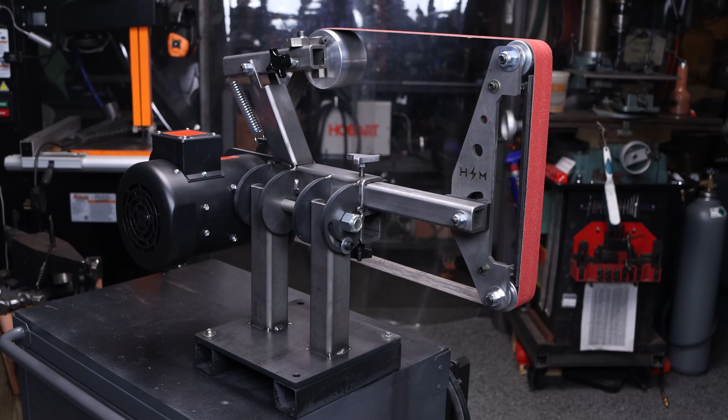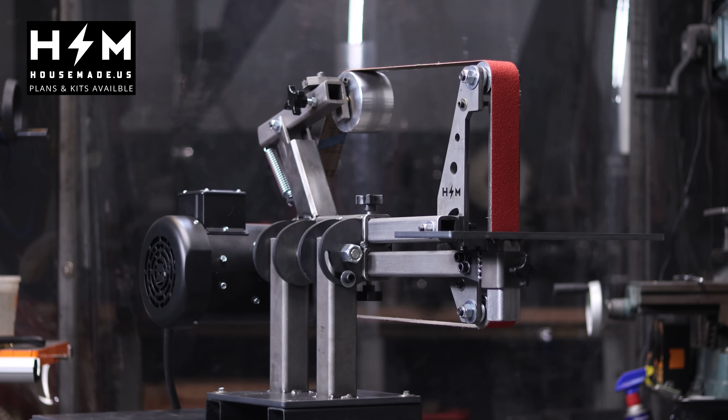But ultimately what it is, is a very nice, heavy industrial belt grinder. The idea was conceptualized right here on YouTube, and then you all gave me your feedback, and we've now brought it all the way up from a concept to a prototype, many different generations, and then ultimately led it to manufacture.

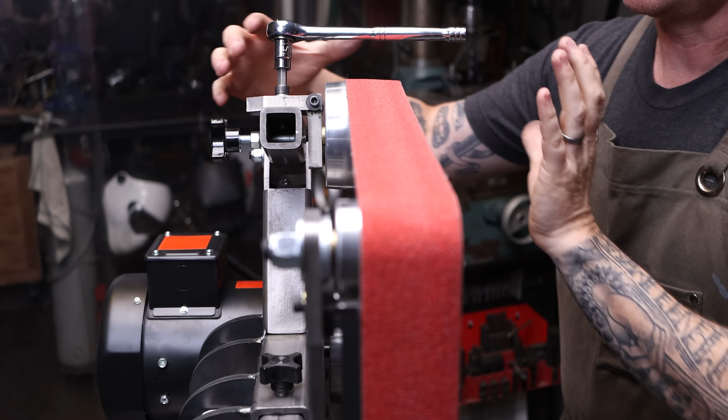Now, this video is going to seem a little bit Revolution specific, but it will apply to just about any 2x72 belt grinder on the planet, okay? So I encourage you to watch the video all the way through. There's a lot of details. Just sit down, watch it, and soak in the concepts that we're talking about here, because the mechanics, the physics, and everything that's going to be talked about here, the concepts, are going to apply to just about any belt grinder, okay? And then once you've watched it all the way through, you can jump into your build and actually start tweaking it and tuning it. I do believe that's the best way to achieve success.

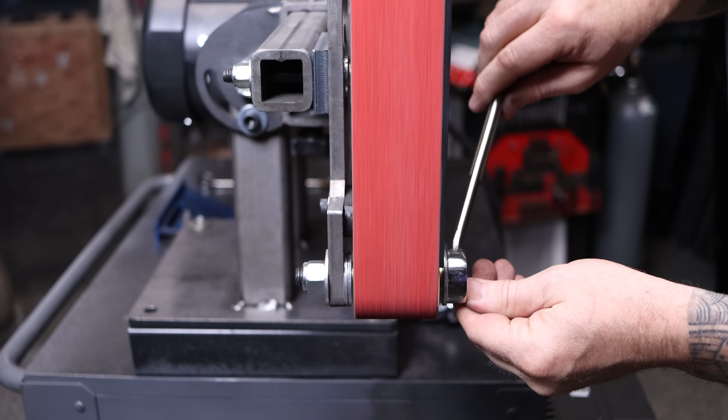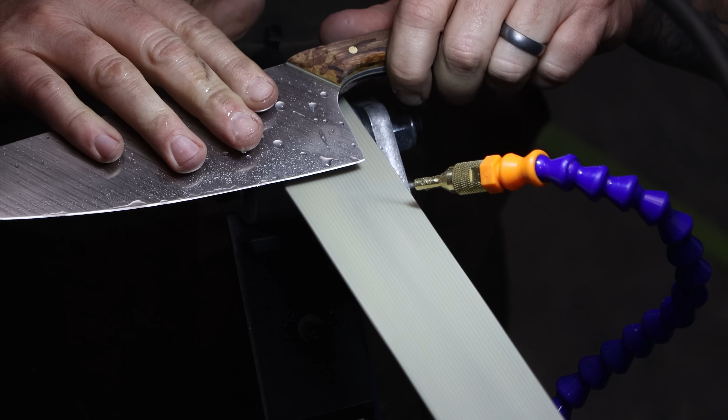Now, a few of the things that we're going to talk about in this are probably going to blow your mind a little bit about how simple it is to actually get a belt grinder to track forward and reverse. I get a lot of questions about that. Why would you want to run your belt grinder in reverse? There's other videos out there on that. I like to run my grinder in reverse for putting edges on blades, sharpening, working with wood handles. There's all kinds of reasons why you'd want to do that, and I love having that flexibility.

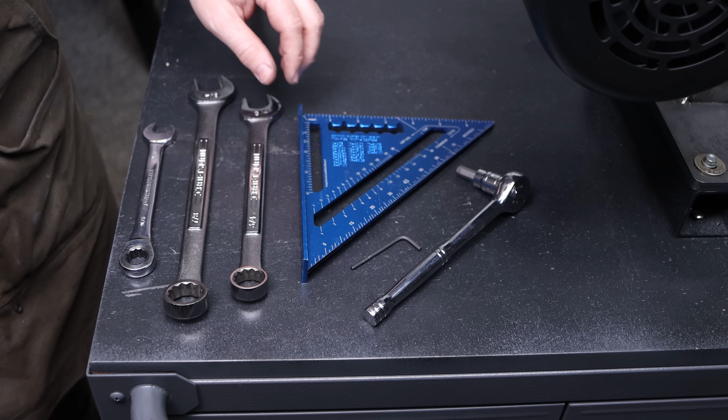Anyway, why don't we just jump right in? I'm gonna go through some of the tools and things that we need to get set up, and then we're gonna get this belt grinder tuned and ready for work. All right, let's discuss what we need as far as tools. We're gonna need some box end wrenches. I have a 9/16, a 7/8, and a 3/4. We're gonna need the Allen wrench that you'll use to loosen up your drive wheel. In my case, it's a 3mm. A 5/16 Allen wrench. In my case, I'm using a ratchet style.

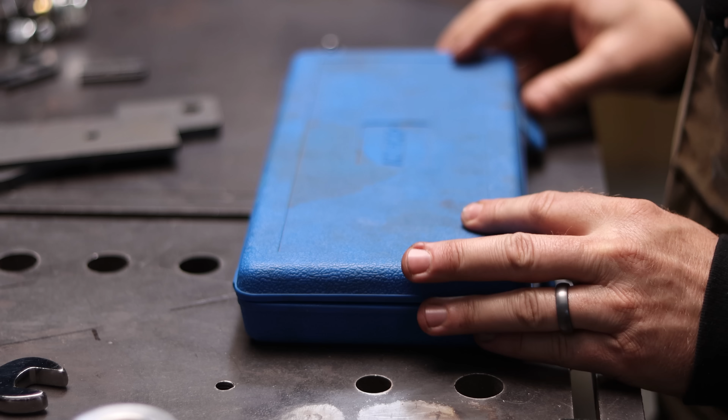Believe it or not, this is one of my most favorite tools in the entire workshop, my little set of these guys. I got them on Amazon.

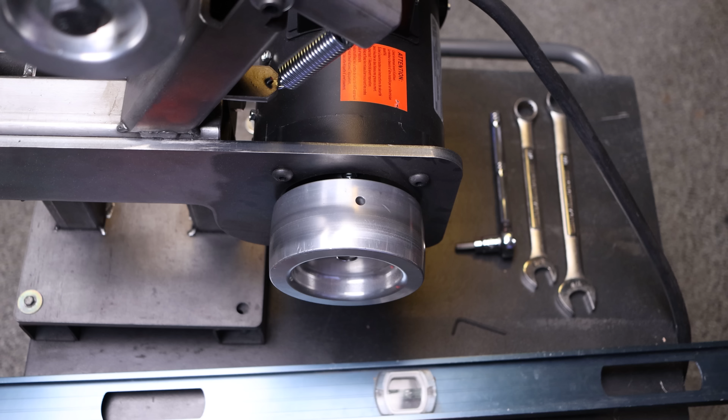But yeah, I use these all the time. A speed square is really useful for a couple of different applications in this. It's 100% not necessary, but I do like having one around. And then also a 4-foot level. The belt matters. When you actually start looking at belts, you'll find that a lot of them are very different, and a lot of them don't track the same way. So I like to use a good newer belt.

This is an 80 grit ceramic belt. You don't want to use like a 36 grit. You don't want to use a really low grit belt because they're a lot thicker. In this case, you want something that's flexible. This is 80 grit with a canvas back to it. That's a really nice belt to use in this process, because it's going to be somewhere in the middle of all the different belts that you have. You will find that when you switch from belt to belt, a majority of your belts will not track the same. So this just gives you a good index when it comes to the belts.

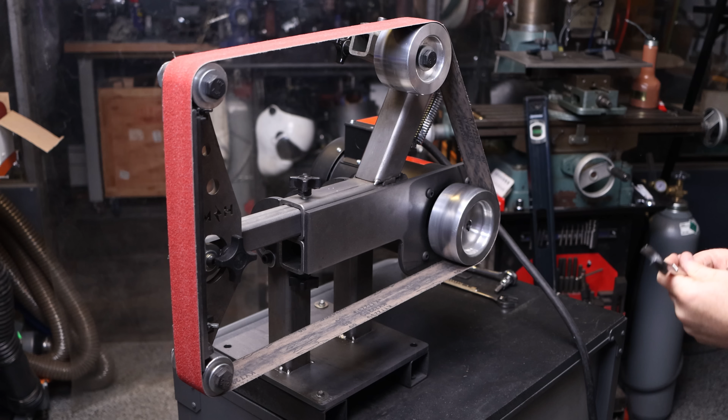Also, let's go over some nomenclature. These are going to be considered the platen wheels. These two wheels right here, they're 2" by 2". This is a tracking wheel. I like to run the 4" wheel. Some people run a 3" wheel. I've not seen a difference between the two sizes. I just think 4" looks better. And then the drive wheel. In this particular case, we're using a 5" drive wheel.

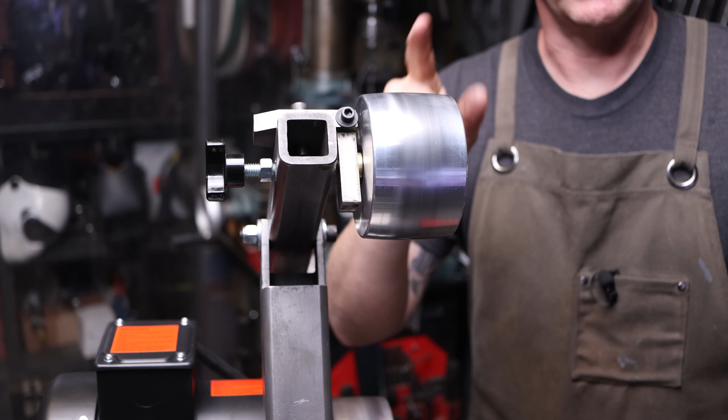So let's talk about axis real quick. When we swing this wheel out, that's going to be the primary axis, in and out. And then when we grab the entire thing and twist, that's going to be our secondary axis. So primary, secondary. One thing to double check is to ensure that your tracking arm is tight.

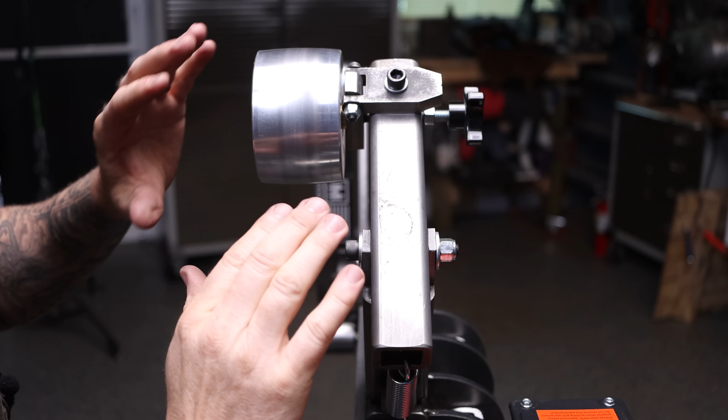Now you can see here I've got wobble back and forth, and that's no good. So we're going to go ahead and tighten this up. And the proper tension on this is somewhere in between, nice and tight where it can't move left to right, but it also needs to be able to bounce on the spring. So you don't want it to be locked down to the point where it can't bounce. So let's just... There we go. So we got no left to right movement, but we've got bounce and return.

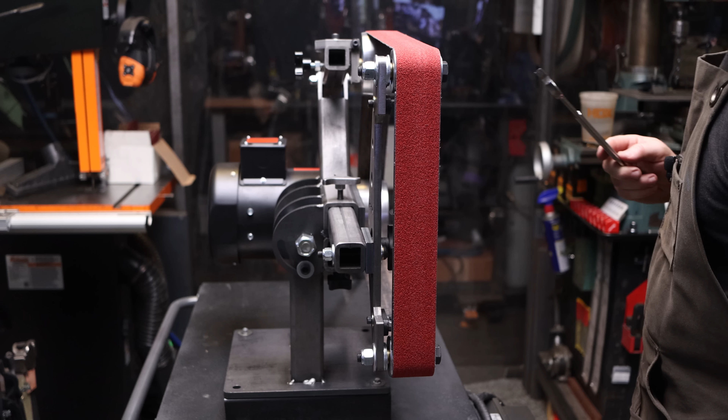One of the things I cannot stress enough is, regardless of what build you have, if your wheels are not somewhat aligned, meaning in a straight line, if you can think of this belt just like resting on a table, what would it look like? And you want those wheels to kind of match that profile. If you've got one wheel that's 3/8 of an inch that way, or 10 millimeters that way, or whatever, and one wheel going this way, you're never going to be able to make it track.

Now, when you build the Revolution, I give you a spacer to go here, and that pushes the D plate out. And then all of the hardware and all of the little cut pieces that we put in here for this platen make this belt just want to ride in one straight line. So keep that in mind. If you don't have that, you're going to want to fix that first, and then start moving towards getting your grinder to track forward and reverse.

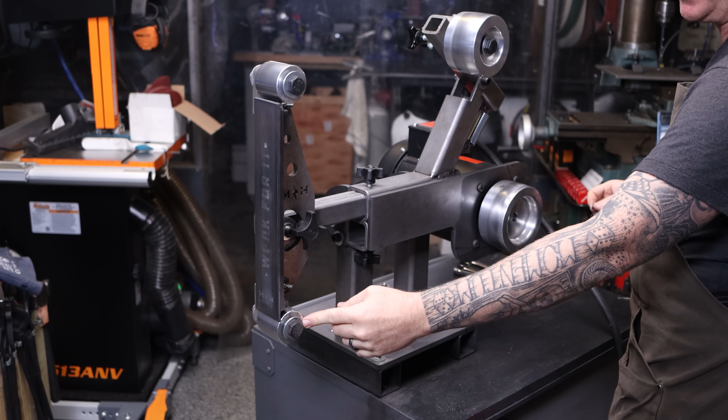Okay, so the first actual step is going to be indexing the drive wheel against the bottom platen wheel. And if you've got your drive wheel locked down, take your Allen wrench, loosen it, and then grab your 4-foot level here. And then what we're looking for is a straight line against this drive wheel. Now, this doesn't have to be perfect, but it has to be close, and you can kind of get an eyeball look at this thing as you're doing it.

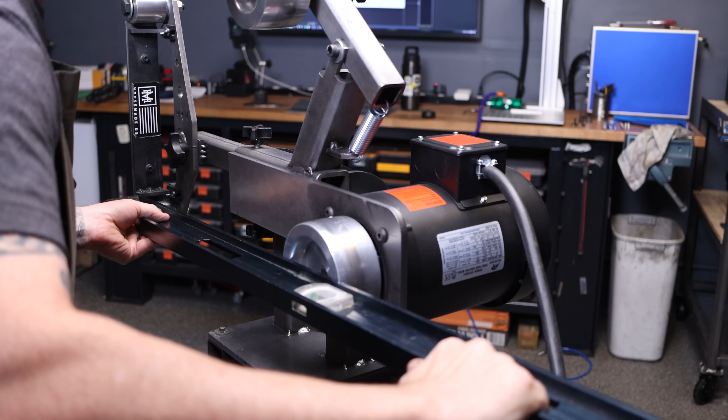You'll notice, wherever I have this thing seated, it wants to live in a specific spot. So I'm just going to push it in till I feel that that level is resting on this drive wheel nice and flush. And then it should be lined up with the outer edge of that bottom platen wheel. All right. So as I bring it down, it looks pretty close. I might pull this out just a little bit. Yeah, that looks good. Take our Allen wrench, tighten that down.

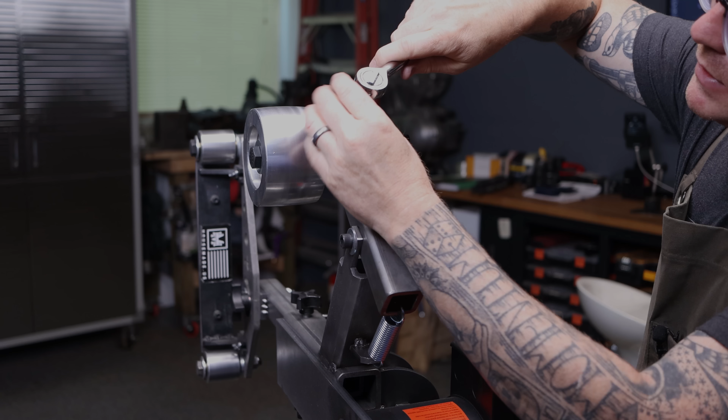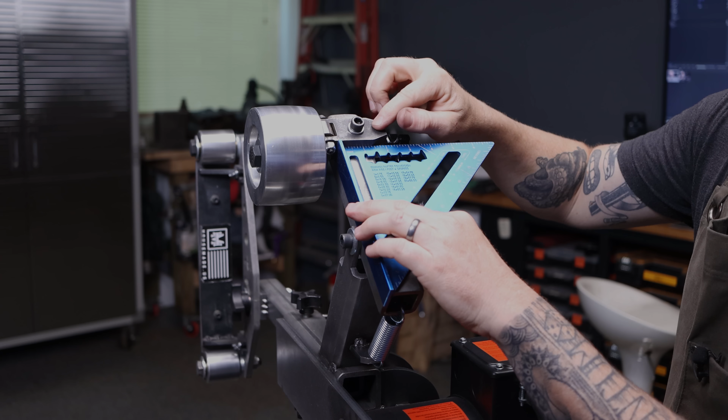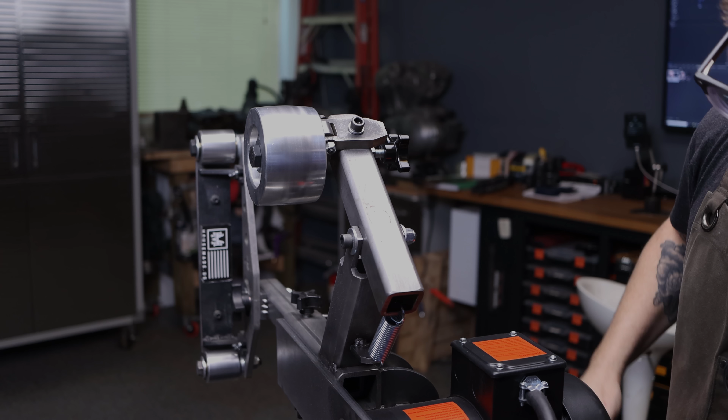Okay, the next step is you're going to want to loosen this just slightly so that you can turn on the secondary axis, which is like this. And you're going to want to grab just a small speed square. You're going to want to try to square this up as much as you can to the tracking arm. This is really just for indexing, okay? This isn't going to be probably where this thing lives, but what we're trying to achieve here is as straight as possible, 90 degrees off of the tracking arm. That way everything should line up down the way. Now if it doesn't, no big deal. We're going to take it apart and make it right. All right, tighten that down just slightly.

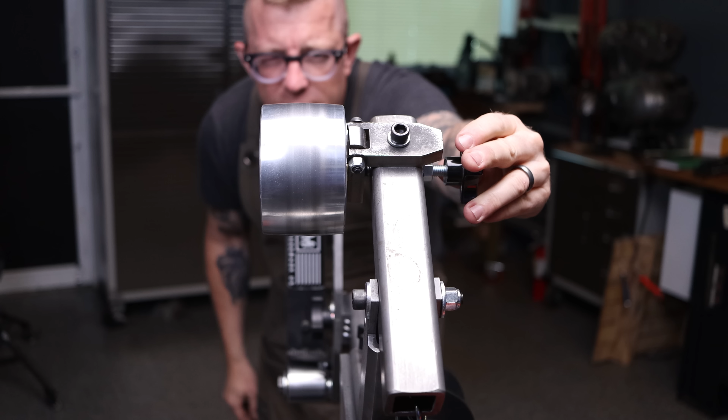One final adjustment is we want this wheel to be as parallel to the base plate as much as possible. So you can kind of eyeball it. You can also use your top platen wheel as an index as well. And this will all start to make sense in just a couple minutes. Looks good. Okay, so now we've got all our wheels indexed. Let's throw a belt on it.

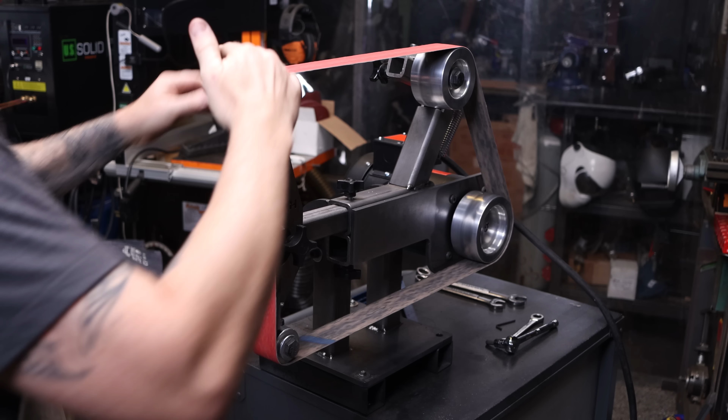I'm just going to roll it by hand, and we're going to see how well it tracks across the front of the platen and across the top of this tracking wheel here. Okay, you can see here that we are tracking too far to the right, which is that way. The belt should be riding right along this leading edge out here, and it's definitely not doing that in forward. Now your first instinct is going to be to grab the primary axis and adjust it. Don't do that. You actually want to adjust the secondary axis first.

So we're going to take this, we're going to loosen this top bolt just ever so slightly, enough to where the mechanism stays put even with belt tension on it, but we're able to rotate the entire axis. Now, because the belt is traveling too far that way, we are going to twist the mechanism towards the center of the grinder, or to my left. So just a slight adjustment. We're talking less than a millimeter, maybe even half of a millimeter. And then we're going to tighten that back down.

We're going to just roll this and see what adjustment that made. All right, not very much. Let's do a little bit more. We're going to loosen this up just a little bit more. Another small adjustment. Oh, now you can see. Look at that. It's traveling closer to this edge. Maybe just ever so slightly more. Just a smidge. Tighten that down.

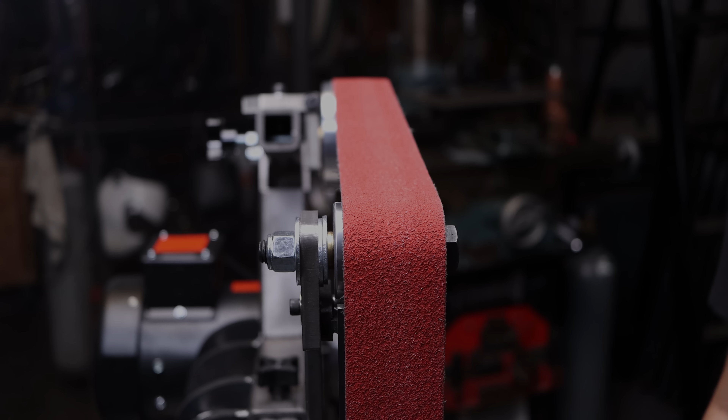All right, so let's kick the machine on and forward. We're gonna go really nice and slow. Let's kick it on and forward and see what she does. Oh, you can see, look at that. It went right back to where it wanted to go. So let's take this, let's loosen it back up, and let's twist it back in. Let's turn it on.

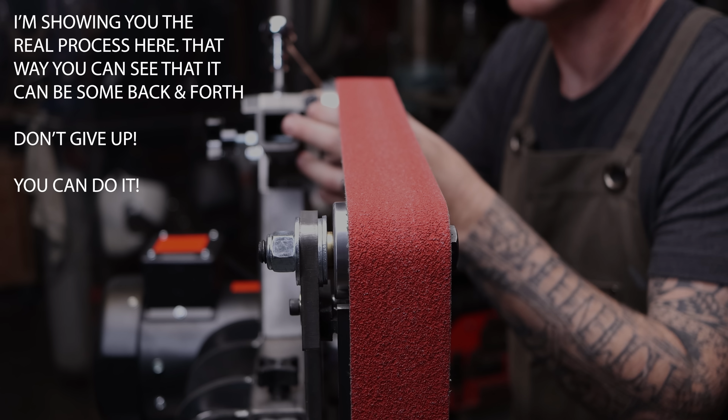Oh, maybe we went a little too far. Slight adjustment. Back. Turn it on. Oh, she's a fiddly one, this one. Now we want it to go just ever so slightly that way. Back and forth, just ever so slightly.

Getting very close. You can see how these minute adjustments, how they can be ever so small and make a huge difference. All right. Oh man, that's right there. I like it. Looking down the belt, I can see it's traveling nice and evenly. Not quite perfect on the tracking wheel, but that's okay. I like that it's traveling across the platen nice and straight. We're going to call that good for now.

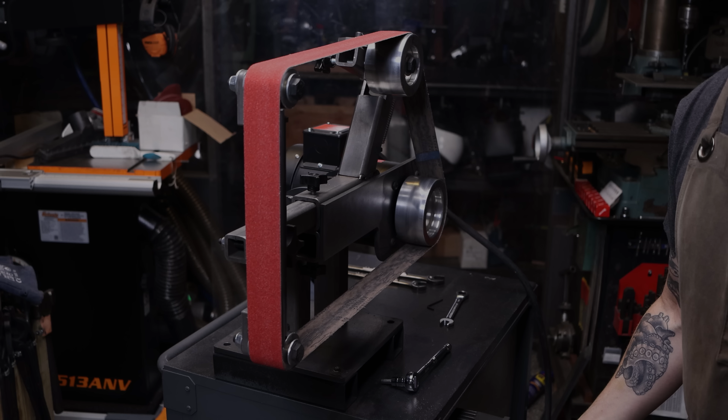Okay, so let's take another look at forward. Nice and slow, you know, we're not going crazy. You can see that the drive wheel is doing its job. The belt is running right on there, nice and centered. And this wheel looks pretty good. With all of our adjustments, I can see that we're meeting our platen right here on the platen face, and the belt is running over that platen all the way down nice and parallel.

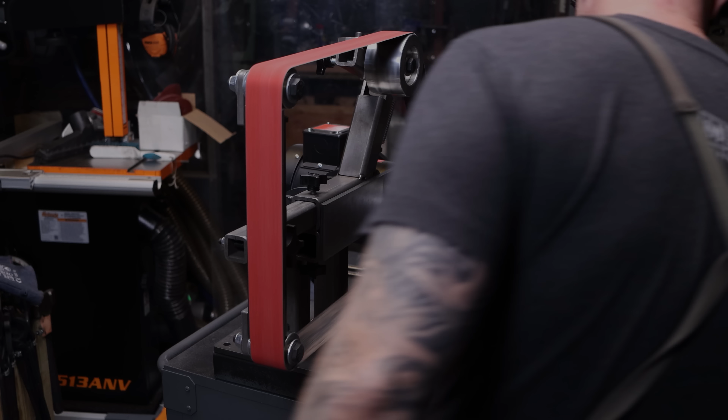Okay, that's my goal. Now the other caveat to this is, can we get it to go in reverse with very little adjustment? At this point, probably not, but let's kick it on and see where we're at. Nice and slow. Oh, look at that. We're riding just a little bit to the left of the edge of this platen, about 1/8 of an inch. Now this might blow your mind a little bit, but instead of adjusting the tracking wheel, I'm actually going to adjust this bottom axle on this bottom platen wheel.

And all I'm doing here is I'm just turning it. And the axle is turning itself all the way through. You can see the nut on the other side is moving as well. That's because there's just an ever so slight difference there on that angle, the way that that axle is sitting inside of the D-plate. Look at how much I can get that to maneuver if I just rotate this. About right there is our sweet spot, and then we'll slightly adjust the primary tracking to bring it over. Look at that, running in reverse.

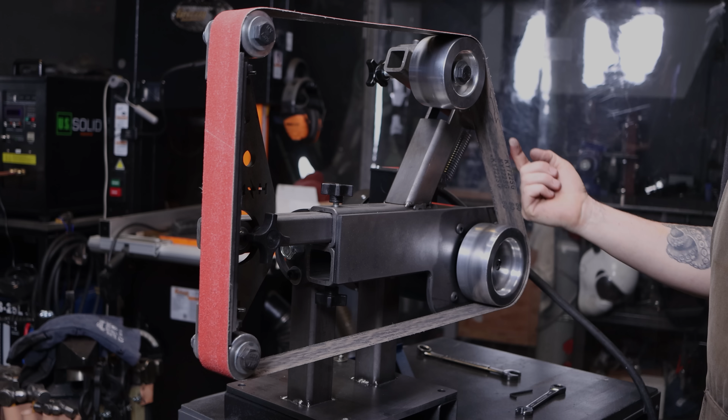Now the reason why this matters is because this bottom platen wheel has now become the tracking wheel. If you think about it in terms of, if this was our tracking wheel in forward, it's because the drive wheel, which is pushing the belt across and around, this is the first wheel it hits, the tracking wheel moving forward. And this is what's setting its axes. Now in reverse, it's the converse, right? It's going to hit this wheel first. The drive is actually pushing it, the force, and this wheel is now setting the axes. So if you can adjust this wheel slightly, just turning it, not tightening or loosening, but just spinning the axle in there, it might give you exactly what you need to run your machine perfectly in reverse.

All right, so here's something that's bothering me. The belt is running a little bit too far out for my liking on this drive wheel. So let's take the belt off and let's slide that drive wheel on the axle just a little bit out. What that's going to do is, if your drive wheel is crowned, it's going to center that crowning on the belt itself. Could come out a little further.

There we go. Now let's see if sliding that drive wheel in and out on the shaft made any difference on the tracking. It did. It moved the belt out that way. So let's grab our Allen wrench. Let's twist our secondary axis. Ever so slightly. Tighten it down. Pulls everything in. A little too much. So we're going to loosen this. We're going to bring this back.